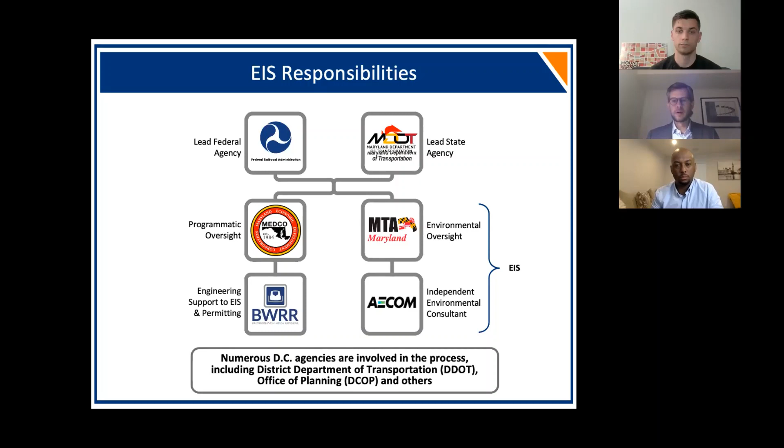The bulk of the project is in Maryland. However, I can assure you the District is very involved in the EIS—they've participated in many meetings with the FRA, provided comments on various project documents in the past, are currently reviewing the EIS, and I'd imagine will be submitting pretty robust comments on it. So DC is very much a part of this process. I can't speak for their specific view, but they are engaged—it's not solely a Maryland affair.

As I mentioned, the comment period ends May 24th. It'll take a long time, I think, for the Federal Railroad Administration to combine all those comments and address them in the EIS. We'd expect that process to wrap up, we hope, in early 2022, which then segues into final design—a very intensive time where we're developing the details of the station and the alignment, and also developing our detailed construction plan.

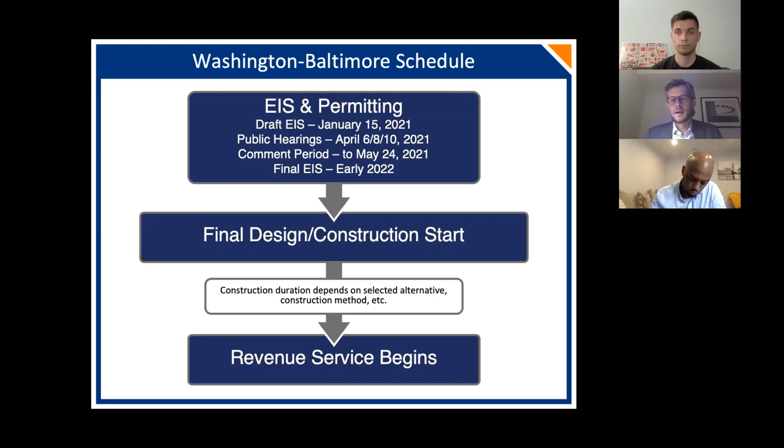I think it's in that process where we'll really start getting into the details of construction—the actual specifics, the specific phasing, the equipment that will be used, and the various mitigations that will be employed. So although this EIS is a major and very important step in the process, it's only a step. We're still pretty far away from construction, and I think this is probably an early dialogue of many that we'll be having as we get closer to construction.

The great advantage of MAGLEV is the speed, the time savings that it offers, and a key component in that is our ability to accelerate as quickly as possible. So we really need to be coming out of the district in as straight a line as we can.

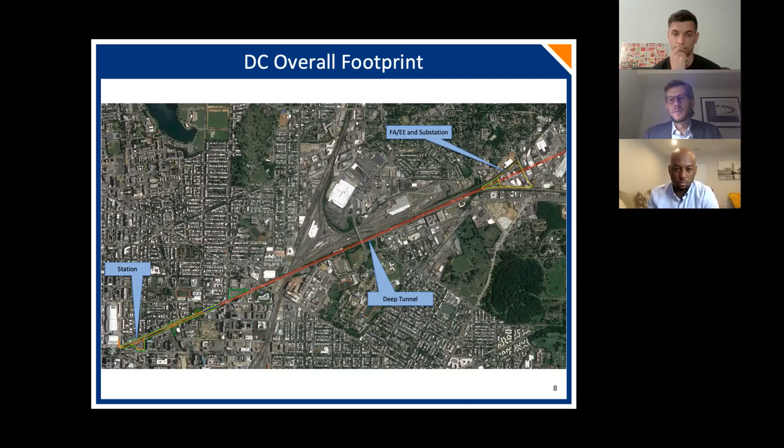We're in deep tunnel coming out of the district. There's another facility a little bit farther to the east called an FAEE, a fresh air emergency egress location. This is where, in the unlikely event there was a need to evacuate passengers from the tunnel, we would evacuate them. We would also propose to site a substation there.

Zooming in a little bit more on the station, here's the concept, and let me really underscore that term, concept. We're in the environmental review stage of this. I think the point is these are ideas that are being put out there for feedback. But things can change, of course.

The idea is that we would have two guideways on top and two guideways underneath those, so it would be kind of a stacked concept. We could have four trains in there at any given time. There would be a switching chamber so the trains could get out onto the guideway and leave the station area.

I just want to be clear, we're not proposing shutting down 6th Street. This is the underground footprint. We are proposing some parking there, and I will talk a little bit more about parking.

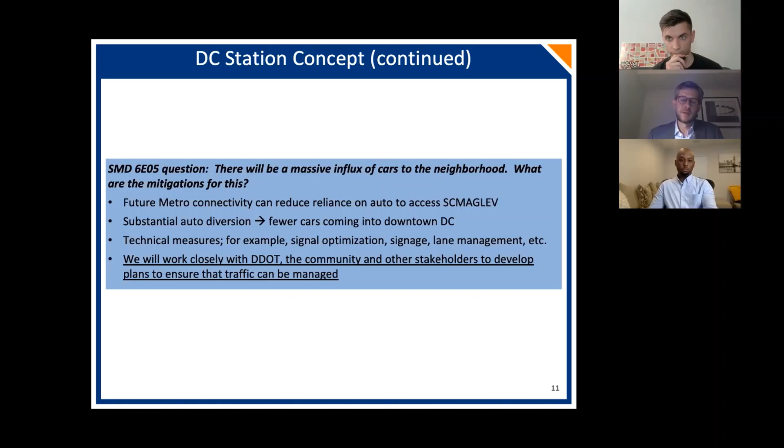Again, I recognize these are not really specific, quantitative things. These are mitigations that are potential ideas. But we will be working very closely with DDOT, the community, and other stakeholders to develop more detailed plans as this process advances. It's not in our interest to have the area around the maglev station totally snarled with traffic so that nobody wants to get on the train. So it certainly behooves us to come up with a method to deal with it in coordination with the community.

Talk a little bit about the overall construction concept. Again, I strongly emphasize this is a preliminary concept. The detailed construction plan is developed after the EIS, when all the basic decisions are made about the alignment, the facilities and so forth. Then we really drill down, develop the very detailed construction plans, figure out the detailed mitigations and so forth. But let me make a couple high-level comments about what construction might look like based on what we envision right now.

One thing I'd like to be very upfront about is that construction on New York Avenue between North Capitol Street and 7th Street Northwest is very likely going to require top-down excavation. Some people think, well, can't you just tunnel using a boring machine under New York Avenue? Unfortunately, because of the way the equipment has to be installed and the switches, which are very large, it does require us to excavate from the top down.

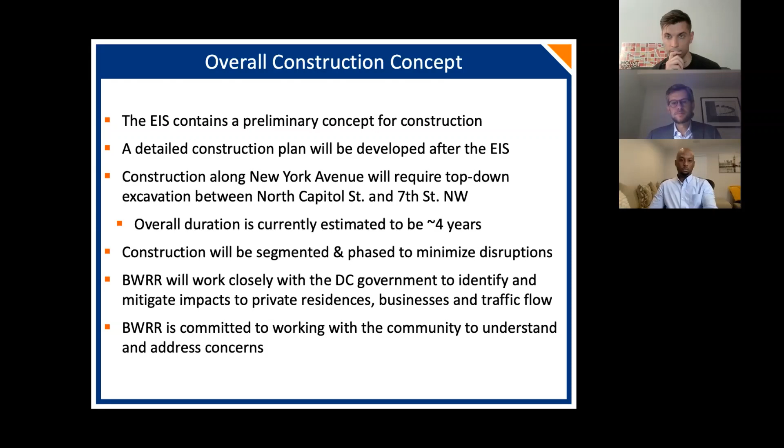Another question we got ahead of time was: what specific plans does the MAGLEV team have in mind to mitigate resident quality of life frustrations and economic hardships endured by businesses during the extensive construction period?

Again, we're still in an early stage, so I can't really lay out very specific mitigations. We're still evaluating the impacts. But we will be developing a detailed construction plan, and that will be the document that really factors in all of these issues.

How do we deal with parking during construction? I spoke with residents of a building yesterday where there's a possibility, not a foregone conclusion, but a possibility that based on how their building is situated and where their garage access is sited, there may be a period where their parking garage is inaccessible. So what are some things we could look at to mitigate that very severe inconvenience to them?

There are things like alternative parking nearby. We'll have lay-down areas during construction. There might be a possibility of building some kind of temporary facility for people to park during that period of disturbance. We could try to work out access to other facilities nearby that might have unused capacity. We might be able to build temporary parking in lots around the city that are currently not used but could be temporarily repurposed for that reason.

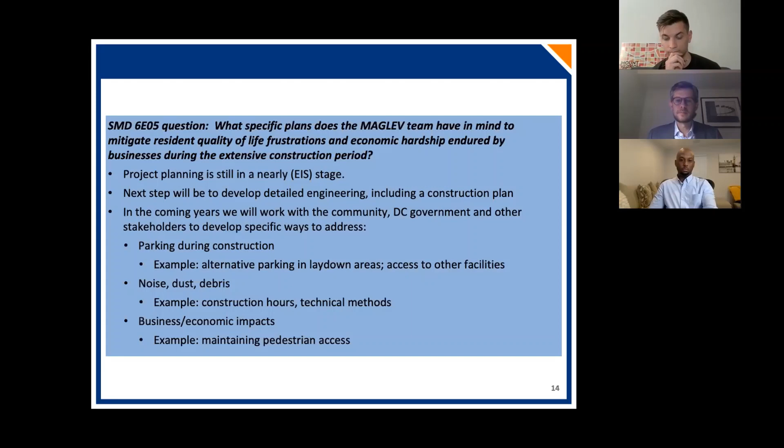So a couple quick words about vibration and magnetic fields. People, of course, say well, that's construction, but then the train is running. It's this huge train, it goes 311 miles per hour, really powerful magnets. What does that mean for vibration?

Honestly, even at 311 miles per hour, at a certain distance below ground, 32 feet, vibrations are completely imperceptible. And the reality is that within Washington D.C., because it's a terminal station, the train will be moving almost at a snail's pace. By the time it's getting to the station, it's probably at like 1 or 2 miles per hour, and it's on rubber wheels. So there is no vibration above ground at all.

In terms of electromagnetic fields, the system meets all the exposure guidelines recommended by the World Health Organization. They follow guidelines published by the International Commission on Non-Ionizing Radiation Protection. The tests for this were actually taken on site in Japan. There were government inspectors who confirmed the validity of the tests. There was extensive media coverage, and all of that data is publicly available, and I'd be very happy to share it with you.

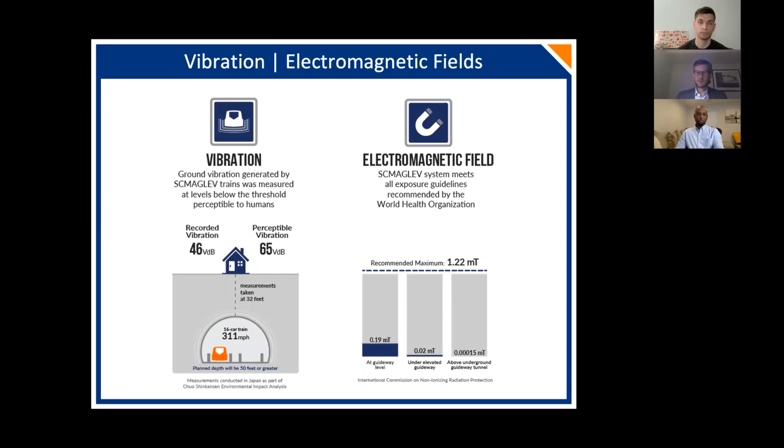There are limitations to these types of forecasts. Obviously, it's very hard, not really possible in all respects to predict the future. We use very industry-standard modeling. It's very sophisticated. We conducted in-person surveys. So we think the results of the forecast are very reasonable. They're very consistent with and conform completely with industry standards.

However, we are now entering what is hopefully the post-COVID world that will have an impact on travel dynamics, and there are certain things in the district that will change. I think there's a shift to bus, to bikes, to pedestrian, to scooter. All of those things have an impact on behavior. So it's kind of my caveat for the ridership work. But we need to plan for a very conservative scenario so we really understand the most severe impacts. In that sense, I think it's good that we looked at it the way we did.

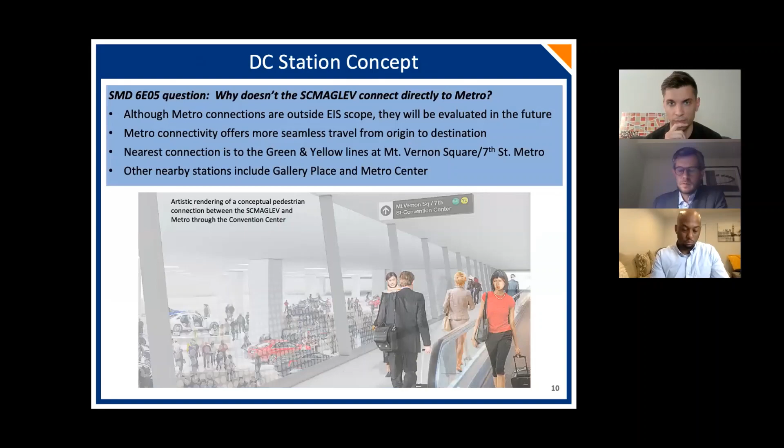Within the EIS, there's unfortunately a little bit of a discrepancy, to be quite candid with you. Again, it's a very large document. I think the federal government is, it's just hard to keep it exactly right. But what I will tell you is, and maybe some people have perused the DEIS, they might pick up on this, the body of the DEIS itself, the part prepared by the federal government, evaluates a 1,000-car parking garage.

In the sponsor's memoranda, kind of buried in the back of the EIS, that's the material that we provided. We actually proposed in that material a 250-car parking garage. So I think there's a lot of discussion that has to happen to figure out what's the right size. Maybe it's somewhere in that range between those two numbers.

I'm not sure, but I think the idea was, the FRA, again, I can't speak for them, and I just want to emphasize they always make me promise I won't make any representations on their behalf, and it's very important that I not do that. But I think perhaps they wanted to evaluate what's kind of the worst case. If these ridership numbers are correct, and there really is this need to accommodate all of these auto-access MAGLEV passengers, what does that look like? And if there is a 1,000-car garage, what are the impacts of that?

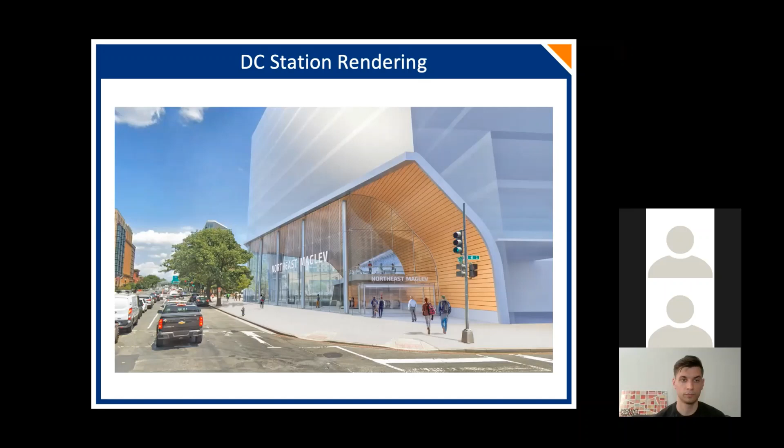Yes, I mean, I would say all options are on the table, and I think it's going to take a lot of creative thought to figure out how to make it work. But I definitely appreciate your comments, and please, we really welcome that kind of thinking, and appreciate your support for the system. Again, it's not in our interest to have so much traffic around the station that no one's going to go to the train because it's miserable to get to it. So we need to work with you all, with DDOT, with other stakeholders to figure out how to make this work.

And I think traffic will change in the city—it is changing as we speak. I've been living here for a long time in the area, and I used to live in the district. Now I'm in Virginia, but my office is very close to what you're looking at on the screen right now. I've seen traffic change a lot. People's behavior is changing—there's a much greater reliance on different modes, on bus, on metro, on pedestrian. And I think it will continue to change, and our traffic management in the city will continue to change.

We use very little things like signal optimization, which is being adopted with incredible effect in other cities, where every single signal is calibrated in real time to actual traffic conditions. That can have a profound effect on traffic, rather than just having preset signals with fixed intervals. If you can fine tune it based on actual traffic patterns, you can achieve huge efficiencies. I think the district is moving towards that, and we're going to see a lot more of that in the future, and that'll help too. But there's all kinds of changes that I anticipate we're going to see in the coming years that will really influence our thinking about how MAGLEV fits into this.

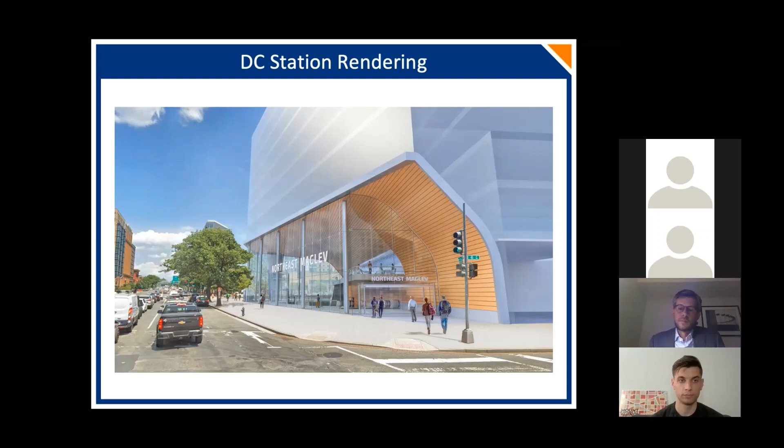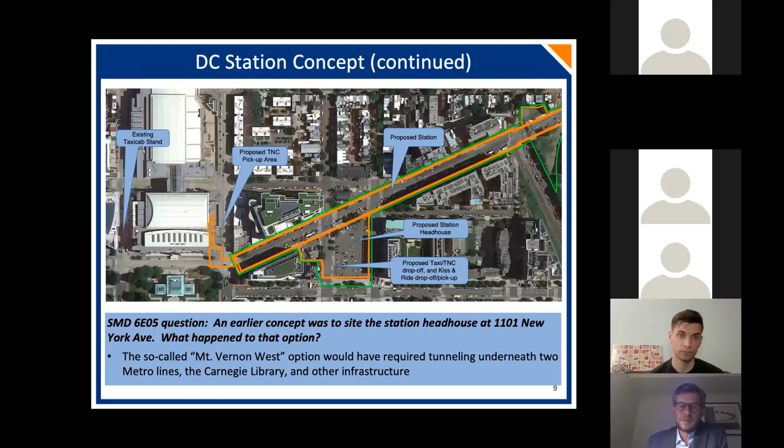Again, a lot of it really depends on the extent of tunneling. You saw I showed those two alignments early in the presentation. There is pretty significant difference in the amount of tunneling between one alignment versus the other. That's kind of a long pole in the tent in terms of construction because we use tunnel boring machines. They only are able to bore about 30 feet per day. It's a very time-consuming process.

Obviously, the station construction itself is pretty complex. So 7 years may seem like a long time. I think for a project of this magnitude, it might actually be a bit aggressive, but that's kind of what we're targeting. So if we were to start construction in late 2023, 2024, which is kind of what I threw out there earlier, 7 years plus a period of testing and commissioning at the tail end, early 2030s is when we would anticipate revenue service for Baltimore, Washington.

DC to New York, I'm hesitant to throw out an estimate on that. It's very hard to predict. What I would say is, to a certain extent, Baltimore to DC serves as a proof of concept. My expectation is that once we build it, there will be strong demand to extend it up the corridor as quickly as possible. However, we haven't done the kind of detailed analysis up the corridor that we've done on this particular market. We've identified viable routes and station locations, but it's really at that feasibility level of evaluation. So I'm not prepared to put a time frame on when DC to New York would open.

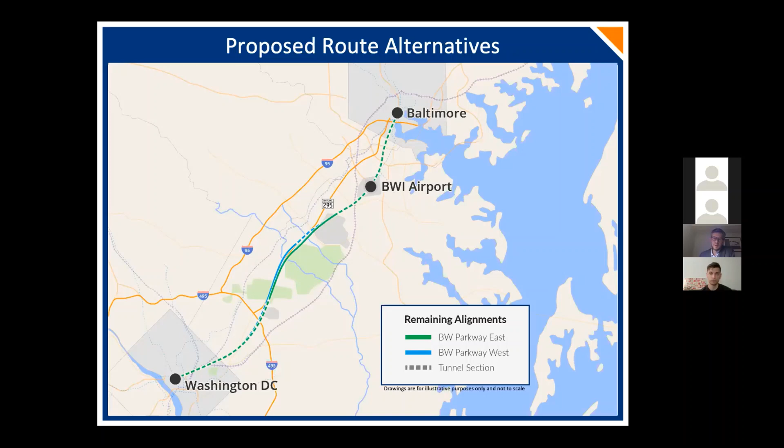But just as a point of reference, in Japan, Central Japan Railway Company is building their system between Tokyo and Nagoya, which is about 180 miles. They began construction in 2015 and are planning to complete the entire construction and have it open for revenue service in 2027. That's pretty quick for a corridor of that length, in about 12 years. I'm not saying we could do DC or Baltimore to New York that quickly, but if there's strong demand and political backing, these infrastructure projects can move quickly.

And I think the current president is clearly a supporter of infrastructure investment, and we support infrastructure investment as well. So I'd like to think we're turning a corner in this country to actually invest in these types of systems. I can't put a time frame on it, but I think once Baltimore-Washington is built, there will be a very strong desire to extend it to New York quickly.

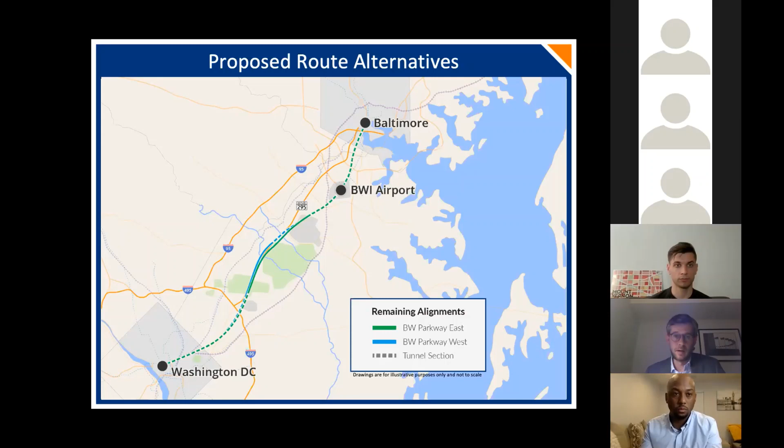Thank you, Ricardo, I appreciate it. And I appreciate your comments about the trains in Japan. I've ridden them as well, including the MAGLEV. It is an amazing experience, and once you have that experience, it really makes you wonder why we can't do something like that in the United States. So I'm with you 100% on that.

In terms of your comments about the boring company, we haven't really had any engagement with them. My understanding is that they had a plan to do some smaller bore tunnels for automated vehicles between Washington and Baltimore, but they removed that proposal from their website. So I'm not sure where that figures right now.

They did talk a lot about how cheap it was to construct their tunnels, and it may well be. The thing is, our tunnels are considerably bigger. We actually have a single large bore tunnel for two trains to pass through at the same time, and we have to do that for aerodynamic reasons. We can't just have the trains traveling in small bore tunnels. So boring a very large bore tunnel is much more expensive.

So the kind of technologies that I think the Boring Company is developing, which I think are fantastically interesting, unfortunately, I don't think there would really be an application to what we're doing on that.

And as far as 395, I'm not totally sure I understood your question, Ricardo. What I can tell you is, to the extent that we have looked at 395, what we have attempted to conceptualize is how to ensure that access to 395 from New York Avenue is maintained even during the construction period. We don't want to create a situation where there's no way to get onto 395 from New York Avenue. So we have some concepts for that, of course, at the discretion of DDOT, how that's ultimately implemented, but that's what we've looked at vis-a-vis 395.

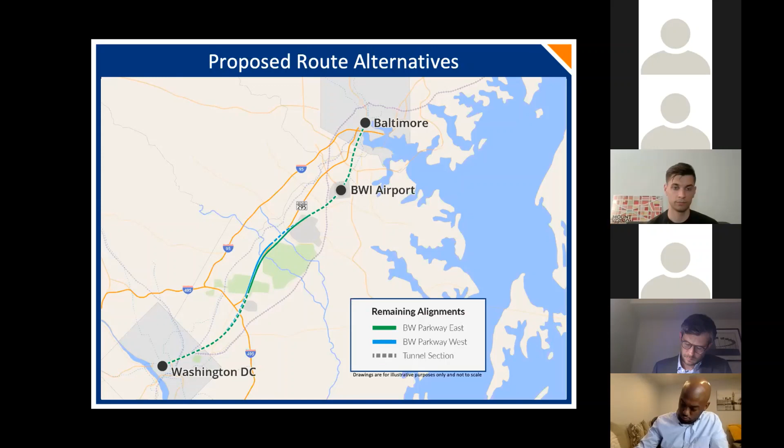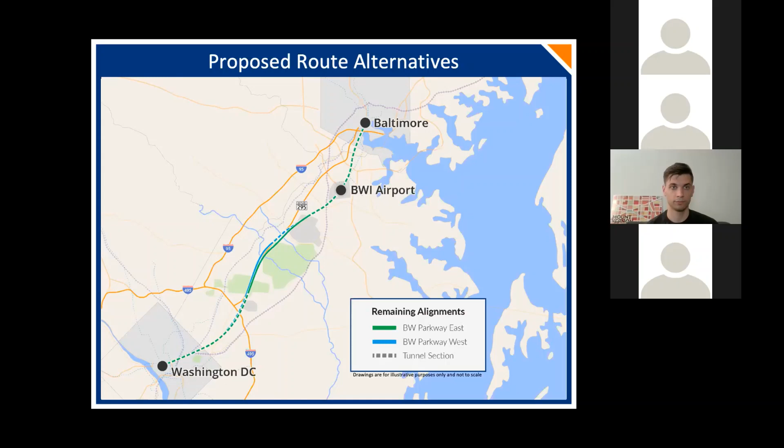I agree with Michael and others that I am super excited about the idea of being able to get to New York in an hour. I'm not super excited about the idea of that taking until 2030 just to get to Baltimore, probably 2040 and beyond for it to be to New York. And I guess it's on all of us to figure out what that means for our property values and economic justice and traffic in the meantime. So I'm a little worried about the way that this project, not by you, Patrick, but by Maglev as a private corporation that's looking to make money, is pushing this and kind of couching it as the only option.

And that seems to be up for debate, as a trip to Baltimore, much less New York. And it's not getting anyone Washington, D.C. to New York in the long term. So it sounds like a boondoggle that is going to inconvenience people who live in this area for multiple decades to come and is being ramrodded through. And I'm really concerned, and I wish that the DC Office of Planning had been on tonight, because they put out, I think, a pretty significant paper on their grave concerns with this project and their grave concerns with the way that the project moved over Union Station.